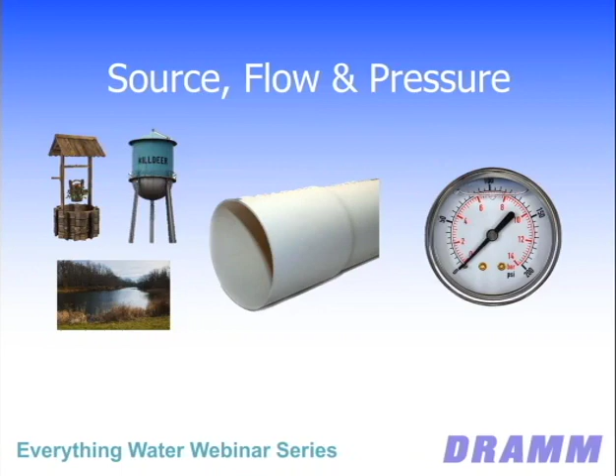So a lot of times, we need to look at flow from a standpoint of how we're going to zone the systems to make them operate properly, and all that goes back to what we're going to water. We need less water to mist plants, cuttings and seedlings than we do when we're watering 2-gallon containers. We need more water when there's more volume of media to wet. So we look at what you're going to water, and then how much water you have available, and that's going to help us determine how we design the system.

We've got a very simple chart. This is available in a white paper on our website. It is very rudimentary, very generic. Pressures can alter this slightly, but the point of showing this chart is that quite often a grower will just tell us, well, I got a 3/4 inch pipe coming into that greenhouse. Assuming you have enough water behind that 3/4 inch pipe, we can probably get about 12 gallons a minute. We generally don't want to exceed that. We could probably get 13 or 14, but realistically, we like to say about 12 gallons a minute, and then we design a system based on that.

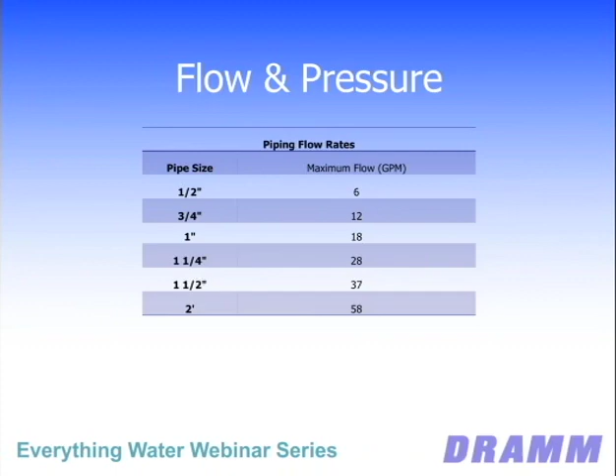We would say, okay, if we've got 12 gallons a minute coming into the greenhouse and we need 20 to do the job, we're going to need to make 2 zones out of that greenhouse to water it appropriately. So a chart like this really helps as you're looking at the system and trying to start from design. We always start at flow, at what the demand is going to be, how much water we're going to need, what the flow is, and then we can start figuring out what goes in from there.

When we're putting together a system, there are really 3 components, actually 4 if we break that last one into 2 pieces, that we consider important to every system. The first one on the left is a filter, a little Y filter. We're going to have a whole webinar on filtration next month. That's not meant to cover this little one. This little guy is part of an irrigation design system, not your entire system filtration. This is filtration for the zone, and we recommend a zone filter at every zone.

We recommend that because over time, you're going to grow biofilm, algae, gunk in your lines. When you first set up a system, you're going to have PVC shavings and grit from that pipe sitting in the yard for 3 months as you're getting ready. That filter is going to protect what's behind it. Generally, for most of the systems we're working with, 150 mesh is about the standard size we would need. They're very easy to clean.

They have a flush to remove large debris, but you just unscrew that cap and you can clean the screen a little bit more vigorously. That's going to protect your investment behind it. And more importantly, when I say investment, I don't only mean the irrigation system. I mean the plants on it.

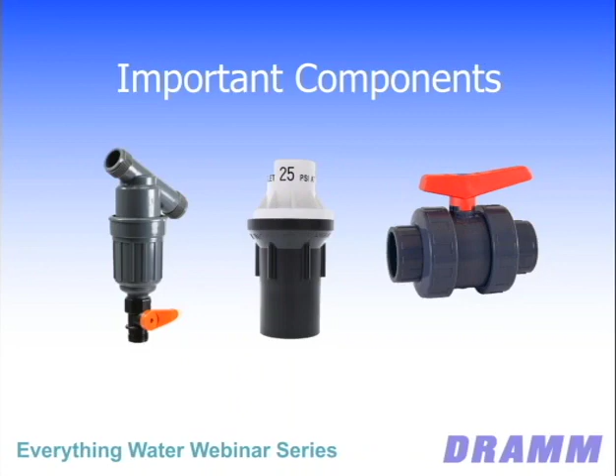If you don't do that, you end up getting a hacksaw out because you've got a glued fitting in there and you've got to cut that piece. And now you've got to go to the plumbing supply store, the hardware store, go buy some couplers and an extra little piece of PVC to make up the distance. Ends up taking half a day and stopping you from watering during that time. So these components we consider incredibly important. We put them in any design that we do, and we would encourage you to include them when you are designing your own systems.

When I talk about supporting your systems, I say that because in greenhouses, we're really not using some of the typical residential type components that we would use in building a house or something like that. Copper is not something that we normally use for watering systems. PVC makes it a lot easier; it's a lot easier to work with. It's glue, not having to sweat copper, solder, flux, and work with torches and things like that.

But it's not as rigid either. PVC can sag. PVC is plastic. It's softer. The fact that you can cut it easily makes it sag. When someone typically puts a piece of PVC into a greenhouse, it looks nice and rigid and straight. That's typically going to remain that way when we're using distribution lines where we're supporting it to a wall or to parts of the structure where there's not as much distance between them, so end walls, things like that.

Where we start to see more of a problem is when we start trying to cross a span. We're crossing a 12-foot post spacing from truss to truss. That 12 feet, without anything there to support it, we get a little bit of heat, we get some sunlight in the greenhouse, we have water, the weight of that water inside there, and we start to see PVC starting to sag a bit. So you need to think about how you're going to support that.

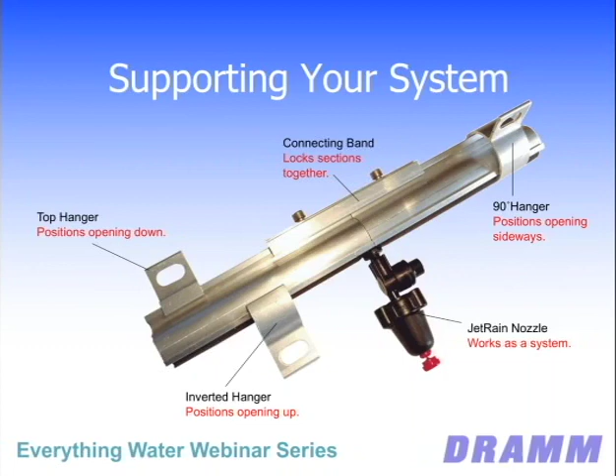And support is important because we're spending a lot of time trying to figure out, I want this nozzle to be at 3 feet above my crop, and I want it to be at the same height as the one next to it so that I get even coverage as I go down my bench. If I sag by 6 inches at the middle of a run, that changes the coverage. It changes the way that the system works. So support, in addition to looking better, is important to the way that the system's going to work.

Now, when we talk about support, we also look at where you're going to put your structure, where you're going to put your irrigation lines. One of the things that we do with this Polyrail is we sometimes mount it directly to the bench. We can mount it at 12-foot sections using a riser system that we've devised, and we generally use this most commonly when we're doing propagation on rolling benches, which is a fairly common thing.

People are trying to maximize the space utilization in a propagation area. It's generally a more expensive square foot build, and so you want to maximize that space. One of the things we do not like, though, is if you're using a misting system over a high value crop underneath. You've got a lot of plant density underneath it, and we want to try and get the best, most even growth we can out of that space.

If we're supporting irrigation lines from the structure instead of from the bench, if the benches move, the nozzles don't stay with the plant. Most nozzles are meant to have an optimal area of coverage, and so centering that on the bench and making that work with the bench is ideal.

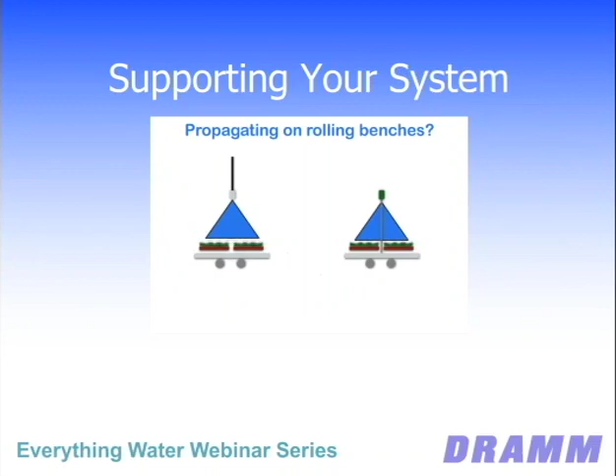So something like this we prefer. Whether you're going to use something like our Polyrail system, or put PVC risers sticking up out of the bench, no matter how you do it, we always find a propagation system works better when we can actually marry the irrigation and the mist to the plants so that as they move, the misting moves with them.

Okay, so we've gotten past the idea of what we want to put together. We're putting the system in place. As I said before, PVC is pretty standard. We're using PVC, we don't have to sweat copper. Makes it a lot easier for the installation. That said, we see a lot of hacksaws in the industry. We see a lot of people maybe not doing certain things they should. PVC is a very easy thing to use, but there's a couple things that can make it last a lot longer and better in your facilities.

Number one, go invest. If you've got a greenhouse and you're installing irrigation systems, go get a good PVC cutting tool. I personally like ratchet cutters. Basically, it's a big blade. There are certain widths they work up to. You get a nice clean cut. It ratchets, so it allows you to keep putting pressure on the PVC as you cut. There's also the wheeled cutters where you just spin them around the pipe and they tighten as they go, so they're slowly cutting around the outside until they finally break through.

The advantage of these things is, number one, you get a very straight cut. You don't get an angled cut. You don't get rough edges, utilizing PVC better and making it a cleaner cut. It's going to fit better into the fittings.

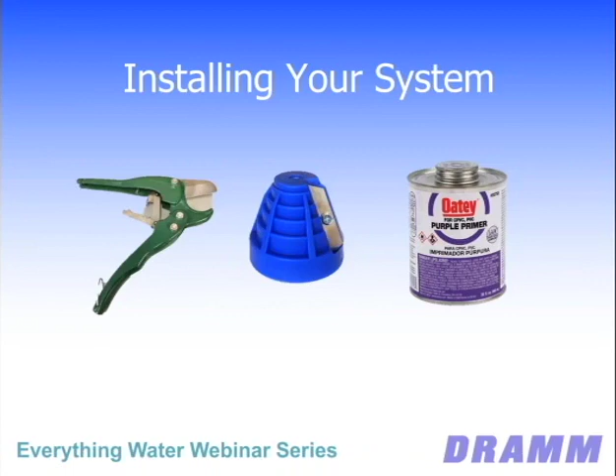Primer is actually going to set the plastic up to be cemented. It's a different chemical. If you're not using this, what can end up happening over time is the joints can start to fail a lot easier. The cement doesn't take as well. So using something like a primer, you don't have to buy purple. They do make clear primer. But primer is going to make a much better bond, which is going to lead to a much better system. You're not going to have leaks at the joints 3-4 years down the road, which is when we start to see that stuff. So consider those tools as you're putting your systems together.

Now, I mentioned we were going to get into control, and probably the most common thing people are using for control is a valve. In fact, that's the basis of anything. We've got different valves depending on how they're actuated. You've got a hand valve like this, where someone's going to come up and turn it on. That's the simplest way to do it. If I've got baskets and I want to drip water into them for 15 minutes, I come up, I turn this thing on, I wait 15 minutes and come back and turn it off. The problem with that is I've got to remember to come back and turn it off, especially if I've got like 10 zones.

You turn it on, you get caught up doing something else in the greenhouse. You tend to forget, maybe you've overwatered the plants. At the worst case, it's a bunch of labor. Someone's sitting there having to pay attention to this. We are big proponents of putting control in. We have our own line of controllers for people to use.

That said, if you've got a climate control system in your greenhouse, we prefer you use that, because those things have some advanced features that we can't match, and we don't want to match. We're not going to try and emulate what they're doing. They're measuring your climate. They can work off of vapor pressure deficit. They can work off of light. They can work off of conditions that we aren't going to be controlling on. So as you get a little more advanced, using things like light and VPD to help regulate how much water and when you water is a good idea.

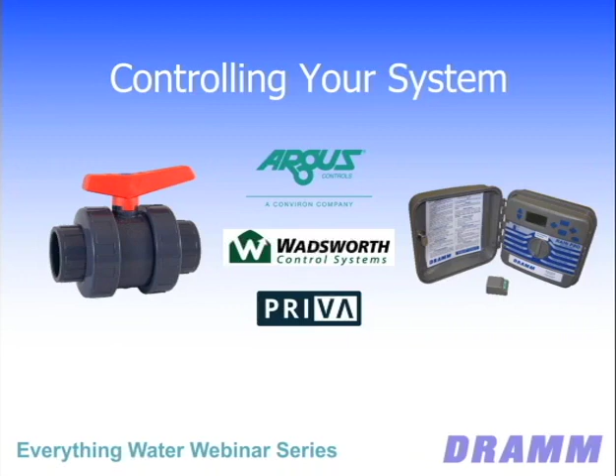A lot of growers we get on the control side of things, the reason they don't want to trust a controller is because they want to make the decision. They want to look at the day, the temperature, the humidity, is it cloudy, is it sunny, and say, you know what, I need a little more water today, or a little less water today, or I'm not going to water today. They don't want a clock making that decision, and I get that. That's one of the reasons we recommend using your climate control computer to make some of those decisions.

But one of the things that's nice about the systems that we sell, something like this little Rain Pro controller, we recommend putting this thing in, even if you're planning on manually turning it on most of the time. I'm going to go in and turn on a valve. Remember what I was talking about, where you've got that hand valve, you've got to go turn it on for 15 minutes, you've got to remember to come back and turn it off.

We set up something like this Rain Pro, and there's two real nice features about this. Number one is we can set up every valve to run for a specific amount of time. So I've got the run that's going to be impatiens, and I've got the run that's going to be begonias, and one's in 10-inch pots and one's in 12-inch baskets, and there's going to be a different amount of water for each of those. So I've got them set up, and one valve's going to run for 15 minutes, one's going to run for 18 minutes, and that's going to be the standard average based on a normal day.

I don't have to assign a start time to that. I can assign that to a program, and I can say all of my baskets are on program A. And I don't set any start times for program A, but I can manually start program A, meaning that I can walk into the greenhouse and say, you know what, I think it's time to water these plants. And I can go up to this controller, put it on manual, program A, press start, and it will run through all the valves on that program so that I don't have to go back to each valve once I've turned it on. I don't have to remember to go turn it on, turn it off. It takes away some of that labor that's involved and just runs the full cycle.

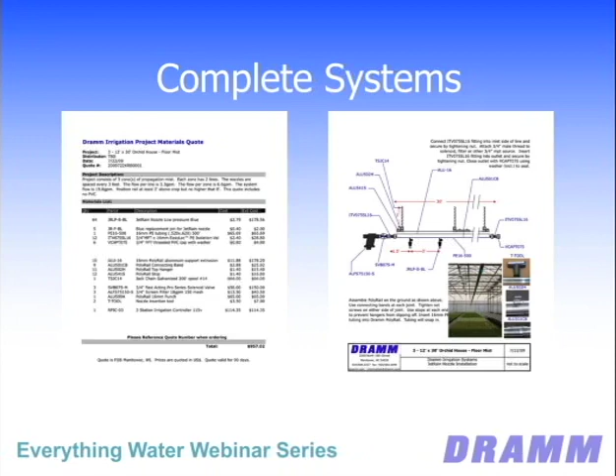Now, that said, we can always do more complex things if we need to. But generally what you're going to get from us is something like this. That's going to give you a nice little component setup. It's going to tell you all the parts you need. It's going to tell you your price. It's going to give you a basic schematic showing how the thing's supposed to get put together. And that all is going to ship with the system as well, so you'll get a copy of this drawing as the stuff shows up at your door. If we need to do more than that, say we need to help you figure out how to actually put the thing together, we might even mark out parts that we might not be selling you, but we can put together some simple drawings like this.

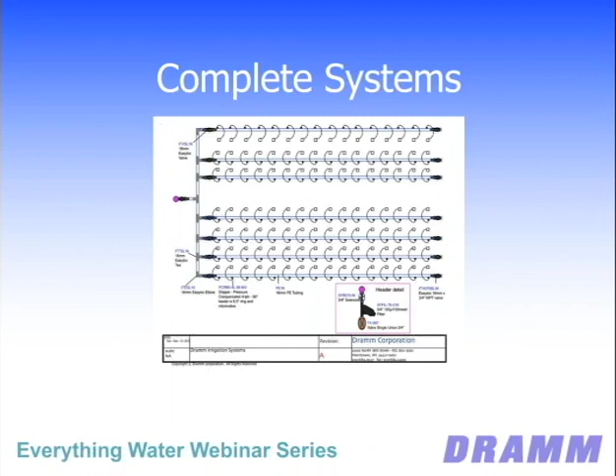So from a simple web form, we can actually go through to a design like this. We generally will consult with you quite a bit, talk to you about how you want to strategize, how you're going to control this, how you're going to manage the zones and things like that. But we can even get to the point now where we start talking about stuff like this. We'll get more into this in the other webinars that we do, but we can design complete water management systems.

So your tanks that you're going to hold your water storage in, all the filtration. We don't really sell fertigation systems. We don't have our own proprietary. We work with other systems. We sell Dosatrons. We sell Anderson injectors. We will incorporate them into a design to make sure that the system all works together. One of the things that we find very regularly is that quite often those things are not designed with thought of what is upstream or downstream from the system, and that's something that we put together into the package.

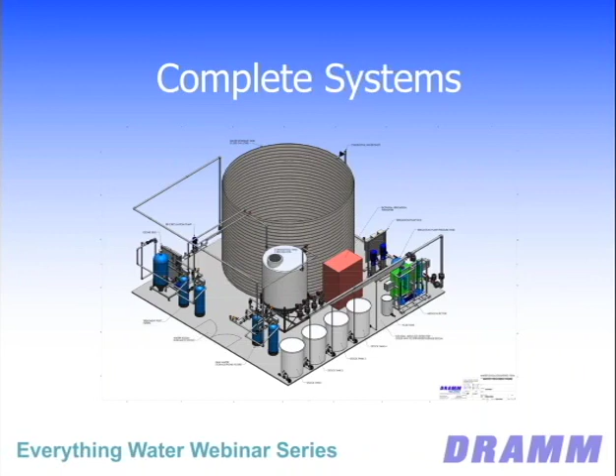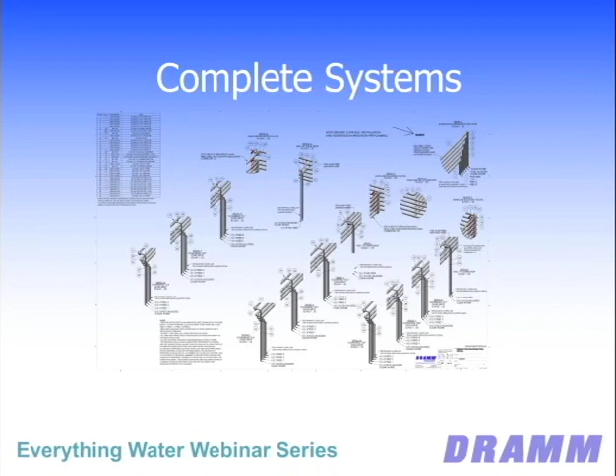Okay, great. So we did have a question about how to spell the name of a tool that bevels the cut end of the pipe. And our questioner did find it. He said it was chamfering. Yep. So that's C-H-A-M-F-E-R-I-N-G for anyone else who might be curious.

There you go. Yeah. Okay. Love Google. Yeah. Great. You can buy it for $5, something like that. It's a great tool. Great.

Also, how do you determine the available flow rate in a greenhouse? Okay. I showed that basic chart earlier, which basically gives you a good idea of flow. If you're not sure, open up the pipe and measure what your flow is. Because one of the things I mentioned, you have a 3/4 inch pipe that goes into the greenhouse, which should give you about 12 gallons a minute. But I don't know what your well pump is set up to do, and I don't know what the city water coming in is set up to do.

And so I might not know necessarily what size pipe's coming in from the city, or how much capacity your pump has or your well has. So not a bad idea to get a bucket, measure for 15 seconds, and get a general flow rate. It's an important thing because quite often we see people that have undersized the flow for the system, which then end up starving the system and making it not perform properly.